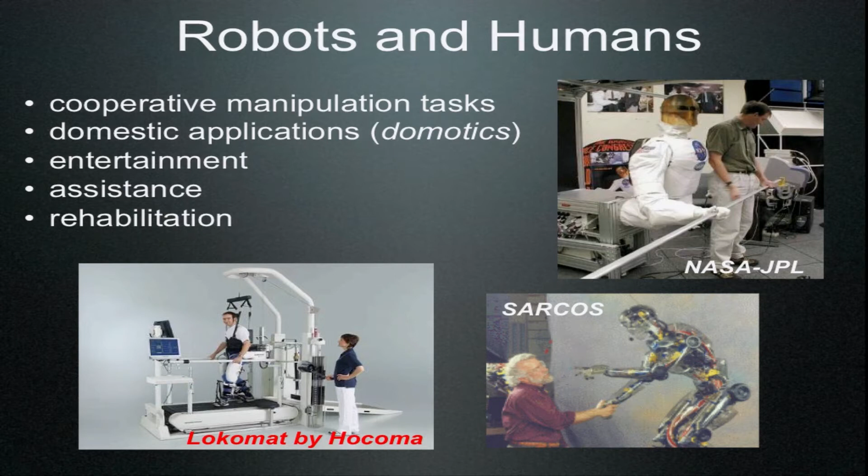So robots are everywhere, are coming. There are some special things that we want to focus on.

First is more traditional, is teleoperation. So there's a master-slave situation. You have a remote robot or manipulator anywhere. You interact physically with the master, and you receive force feedback from the slave. And this interaction is very important.

And of course, the human issues of this interaction are also very important, like fatigue or the capability of working for a long time with these devices on. Of course, this brings you somewhere else for doing tasks, but there's a large effort also for being helped here or wherever you are.

So what is called human augmentation, you see the Berkeley exoskeleton, very lightweight and handy, used mostly for military application unfortunately, but this is another story, which amplifies your capability. For instance, a soldier can carry this heavy load of 15 kilograms for almost the whole day, not being so

crashed, like if it had not this exoskeleton. There are other situations, very interesting, where you have mixed interaction with the environment. So you have physical devices that you touch or that you carry on your body, and you're doing some work in the real world and in a virtual world. So this is another very interesting development. So again, all this situation involves some form of contact between robotic devices and human.

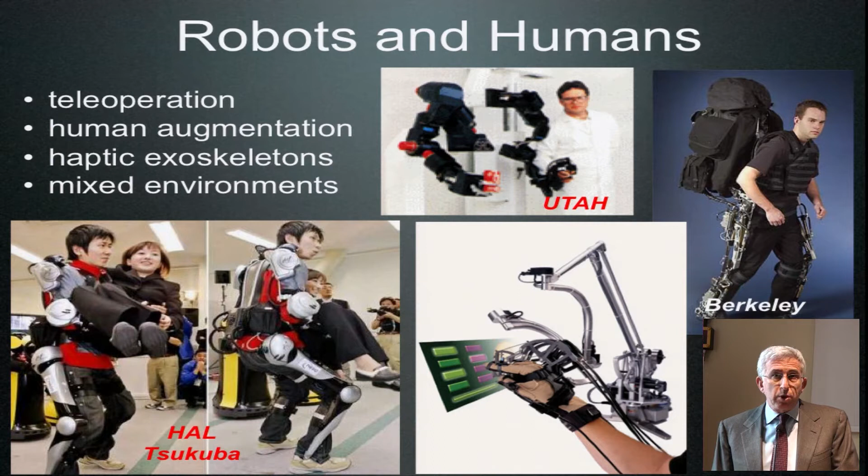So the main issues, or the principal issues, were at the beginning safety. What happens if the robot is not recognizing your intention or applying too much force on your body? And we should always preserve the concept of Asimov, the first law of Asimov. So the robot should never harm you, and so on and so on. So this is motivated researchers in the last decade, I would say, to investigate different types of robots, more lightweight, more compliant, but still with the capability of doing useful and accurate work on the environment.

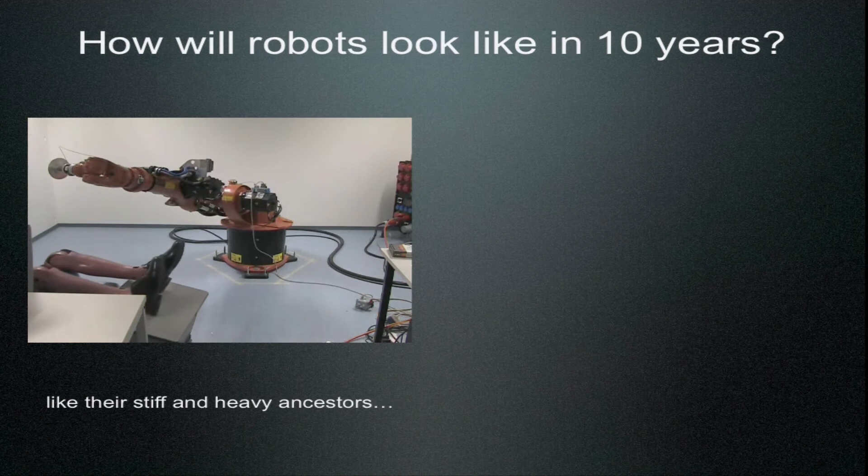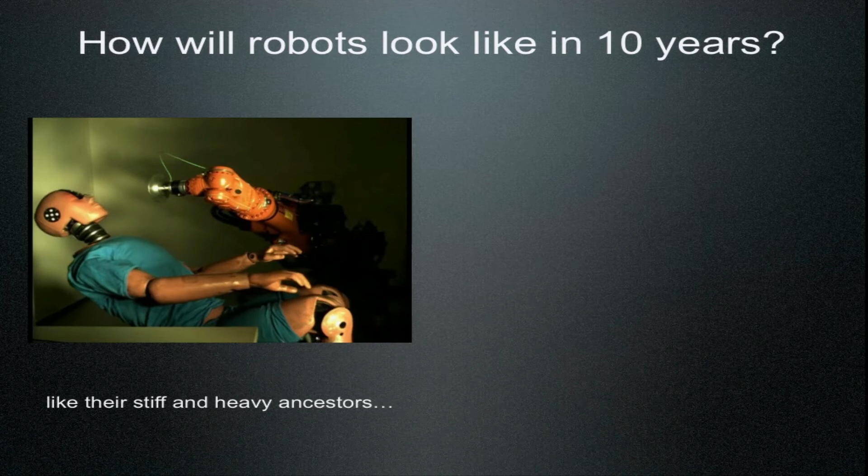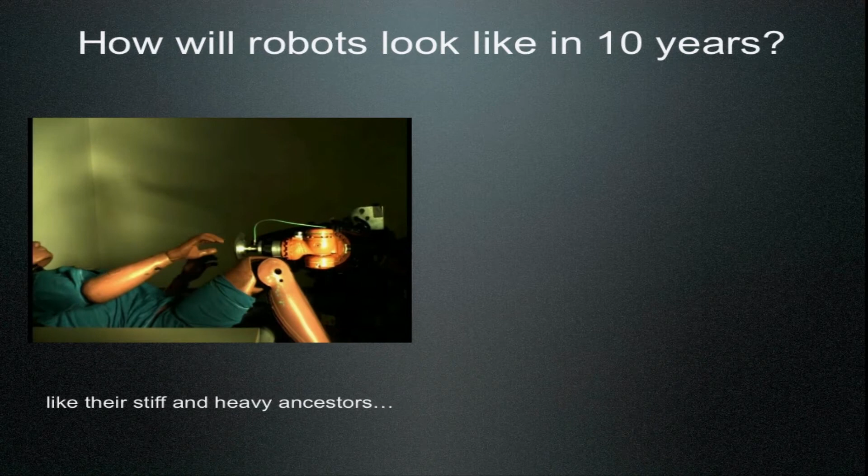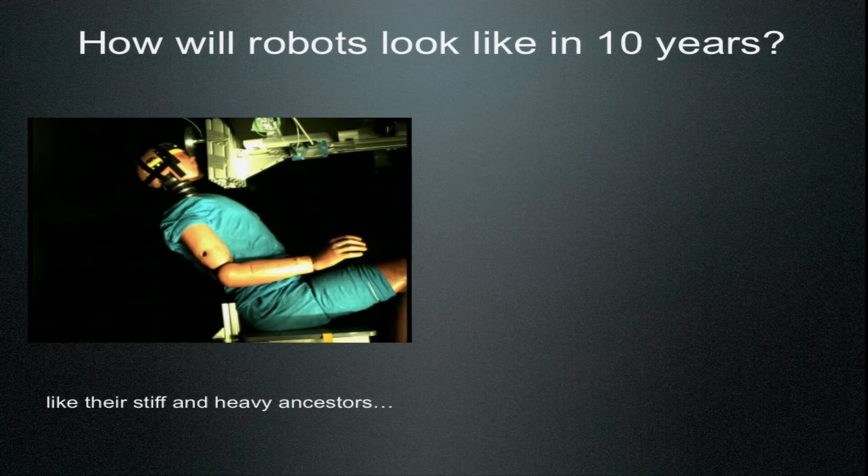Here you see a video recorded at ADAC in Germany, the Safety Institute for Automobile, where they use dummies for crashing tests. Now, instead of having a car, this is work done mostly by Sami Haddadin. They are investigating the harm, the injuries that can happen when a robot is hitting you. And it can hit you in different places. But the purpose of this video is not showing this experiment, but looking at the robot. The dummy may represent ourselves, very flexible, very harmful, and the robot is very stiff, heavy, and could be fast, and could really hurt the human.

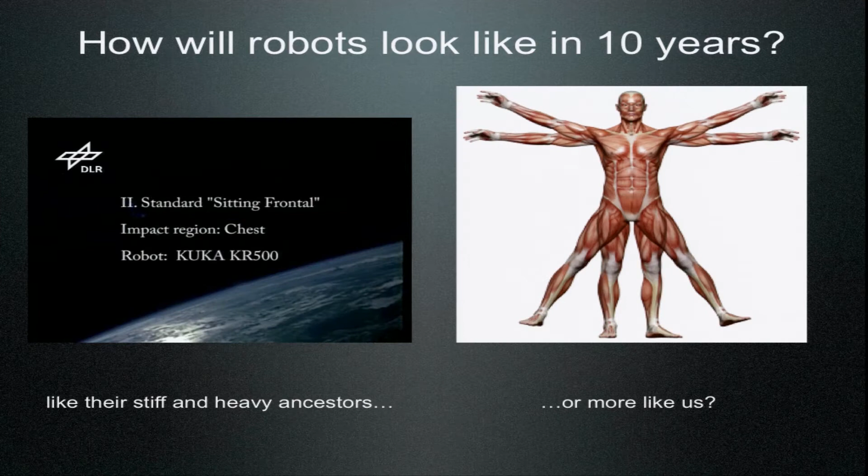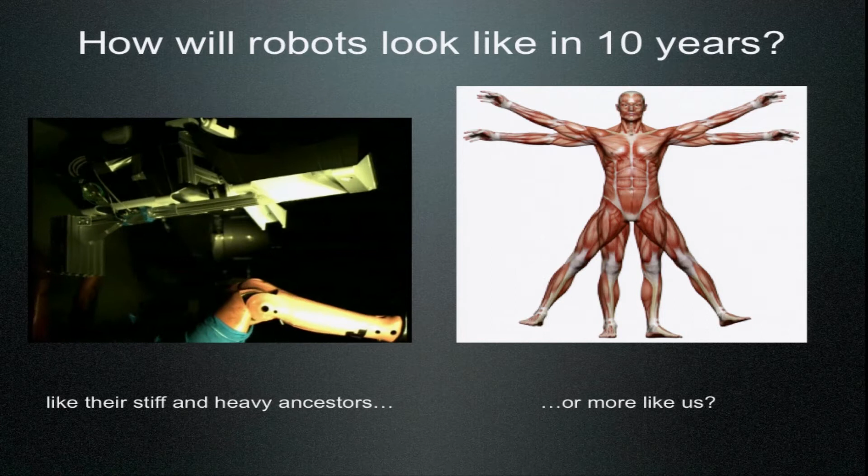So will robots continue to be like this in the next decade or so, or will they more and more inherit some bio-inspired morphology, in particular actuation capabilities of the human, which at the same time are able to perform such different tasks, which involves accuracy when it's needed, or compliance where it's needed, to accommodate for uncertain environment, uncertain forces applied to your body, and still provide sufficient accuracy. So performance is not lost at all.

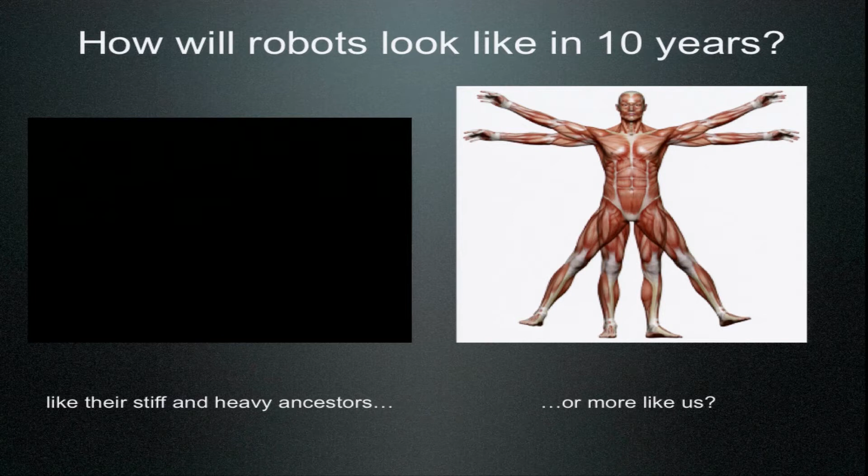Of course, this is a trivial answer to the question, because the answer is clearly we would like to behave like us. So let's look back at the recent or less recent past. I remember very well all these devices. You may have not seen them at all. I've seen them working. So many years ago, yesterday, there was the famous Unimation Puma robot.

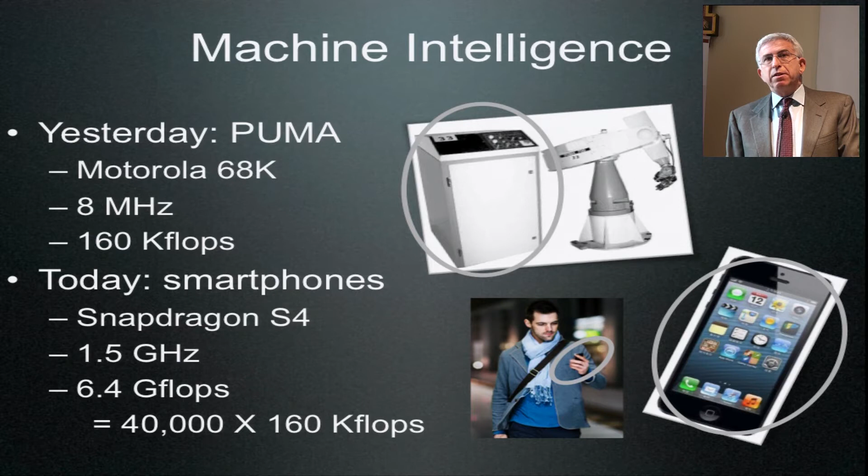This was the first anthropomorphic 6 degrees of freedom all-revolute joint robot, controlled with microprocessors. The control unit was a PDP-11, a mini computer, which was as big as this - you can tell the size. Inside, it had a Motorola 68K CPU with 8 megahertz of sampling and the capability of doing 160 kiloflops operation per second.

So this was yesterday. In terms of machine intelligence, you could do several things - you could do direct and inverse kinematic, even inverse dynamics for the Puma. This is a result of the 80s, I would say.

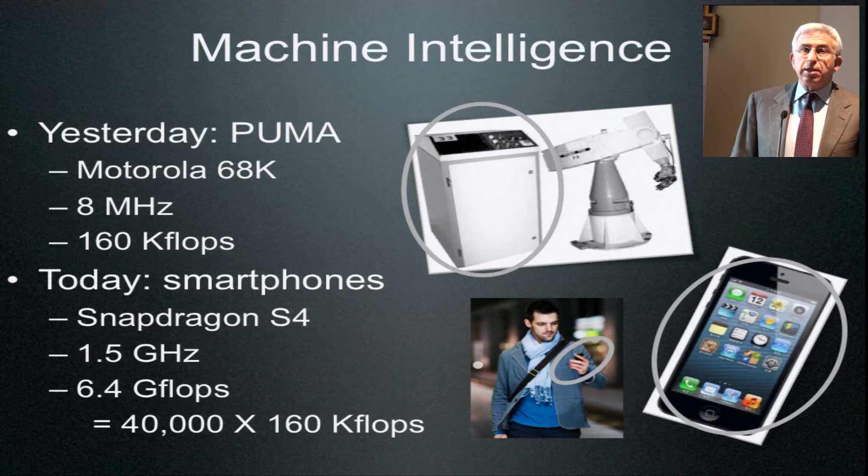Now, if you compare the computational power with, for instance, today's smartphone - please turn them off if you have it - well, there's a factor of thousands of improvement. In fact, in such teeny devices, we can embed a lot of intelligence. So we would think that this is an advance, and in fact it is also for robots and robotic systems.

What about motion? Remember that a robot is the intelligent connection between perception - sensor, sensing - and action. So the motion is always there. Otherwise, you have just a computer. Okay, so progress in computers, miniaturization and computing power - what about motion capability of robots?

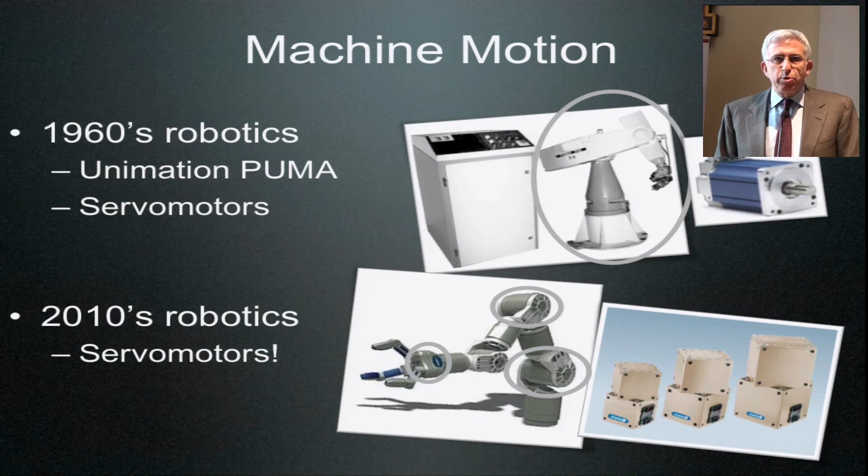So yesterday, the Unimation Puma had servo motors - here you can see one. There have been a lot of advances in this type of devices in terms of power density, size, cost, and so on. What happens now, or let's say 5 years ago? Still servo motors - so not really this 40,000 factor of improvement that we had in other devices.

So the problem that here we want also to help address is how to make robots that are soft, so that have a morphology of a human body. They are likely not to hurt if they hit a human being, but still strong to sustain loads, carry things like the industrial robots with 160 kilograms of payload or more.

On the other hand, we would like to have it simple, because complexity is not something that we're going to sell in the next year. Or at least the complexity should be hidden behind a very simple interface - simple in mechanics and in operation, but still dexterous, capable of doing tasks like those that we have seen in the videos, playing soccer.

2050, the robot team is supposed to beat, let's say, the Rome team of soccer. This is likely to happen. Intelligent, of course, we can embed a lot of intelligence, but yet practical in the sense that the human command should be easily provided and then realized in an intelligible way - what we call legible motion planning and execution by the robot, legible for the human.

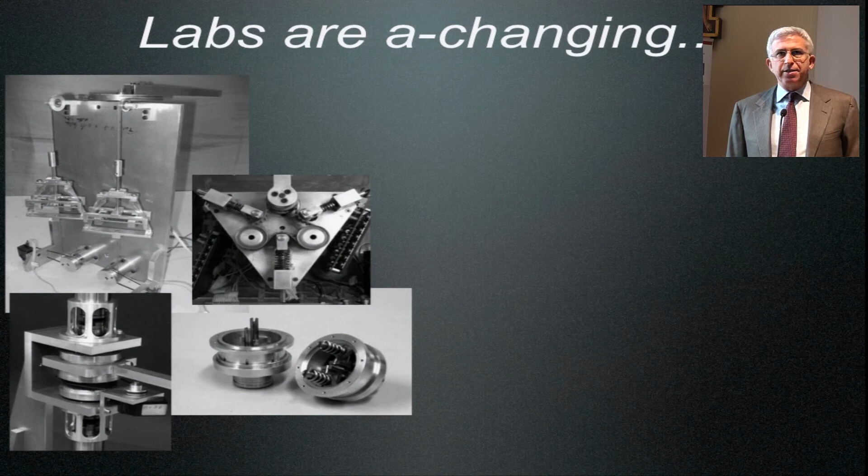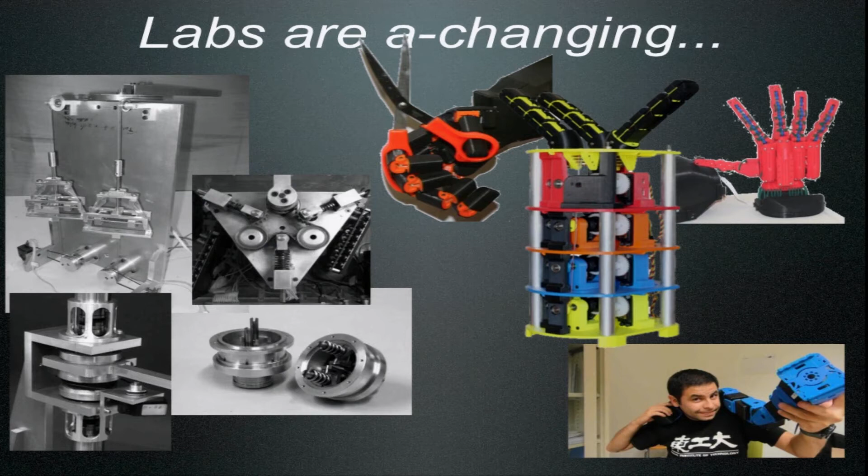But this is a gray area - it's gray, it's on purpose black and white pictures. Why? Because the latest activities in that lab in particular are full of colors. Full of colors means also full of novel prototypes that can be developed very easily thanks to innovative technology in rapid prototyping, thanks to open source software and open source tools, using the web to grab whatever other researchers have already developed and things like that.

Okay, so the robotics labs are becoming colored, which means that we can explore new ways and test them in relatively short time. This is a very important thing. And you can see here on the right some variable stiffness actuation, the hands, the Pisa IIT hand, and also a modular structure built with the QB modules that you will put your hands on in this school.

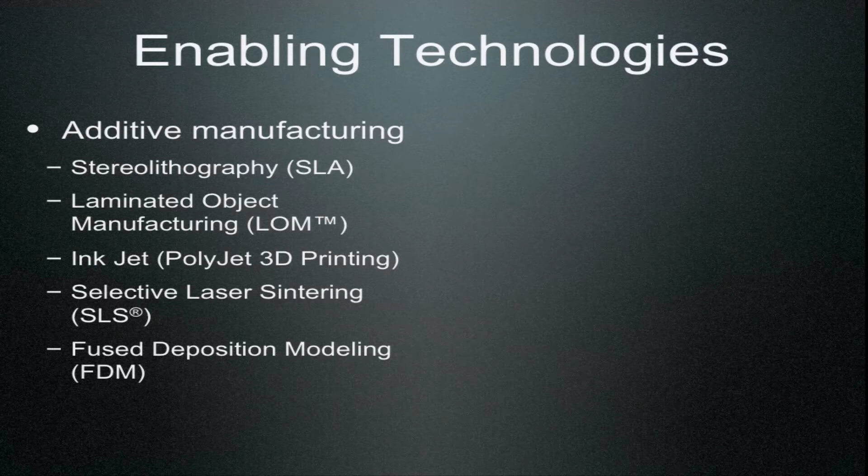So what are the enabling technologies for doing this step? First of all, additive manufacturing. There are a lot of methods, techniques for building in very short time and cheaply from 3D designs, CAD design, objects that you can use and test your ideas for developing actuation and connection devices.

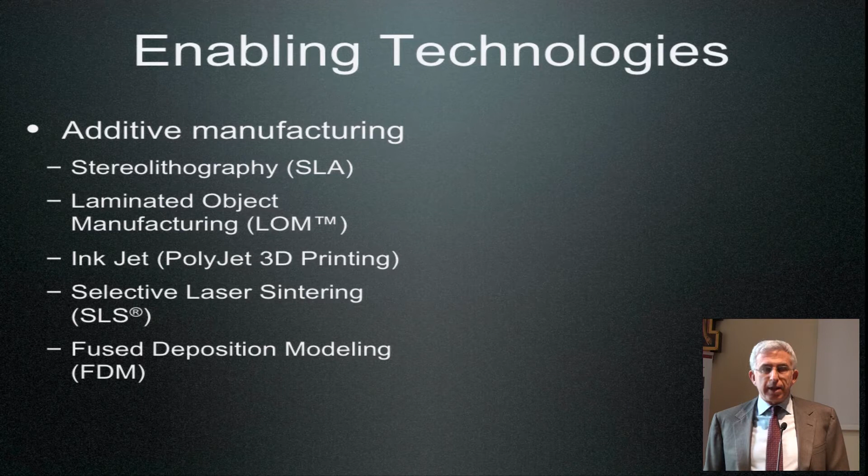Here is a list of several of them. You know that the 3D laser printers are really taking the speed, and the technology is changing. If you have one of these devices bought 3 years ago, it's already outdated, because there are much more cheap, compact, and performant devices right now.

And this is just a list of technologies. Together with this, another enabling aspect that allows us to develop new actuation devices and full body robots is the availability of open source embedded control systems, like the Arduino project.

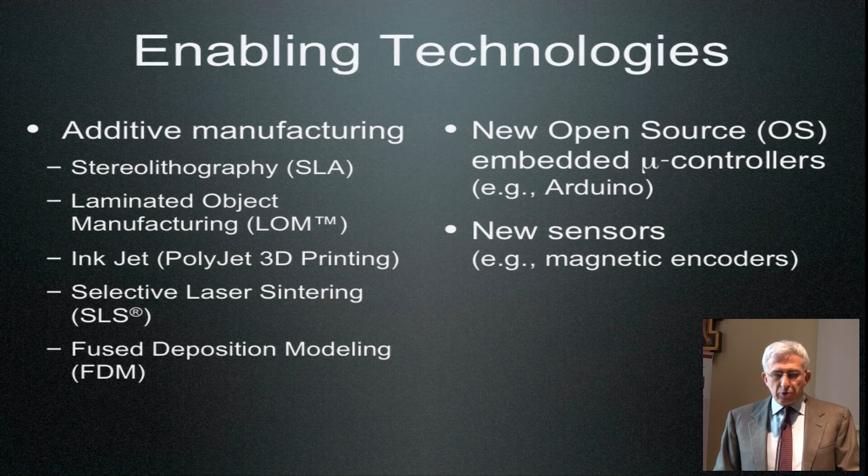I don't know how many of you are familiar with it, certainly the Italian attendees, but not only. There are new sensors, because we try to understand internally what's happening in all the parts of our devices, because this allows us to control them in a better way.

There are other tools which are very useful in this development, which allow you to easily obtain a hardware-in-the-loop system. So you have the hardware developed, maybe rapid prototyped, and you don't want to develop the controller in hardware or whatever you need. You have some simulation software that runs, and before doing the last step, you can put the hardware in the loop, just mimicking all the things that you may expect when you're really implementing things. And this is also very useful.

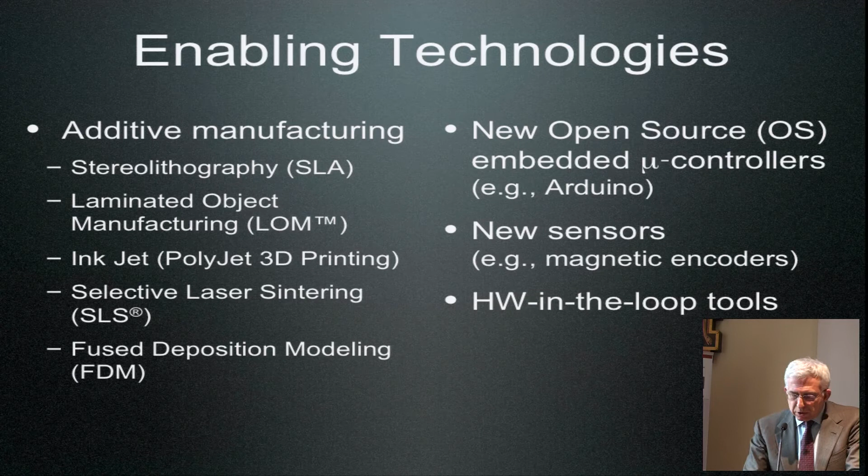And then there are other open source tools which help to work, software and middleware. Everybody, I think, is familiar with ROS. Other toolboxes are available in this same sense, like YARP, yet another robotic platform, which is a very thin middleware supporting the iCub activities, and so on. So these are technologies that may help.

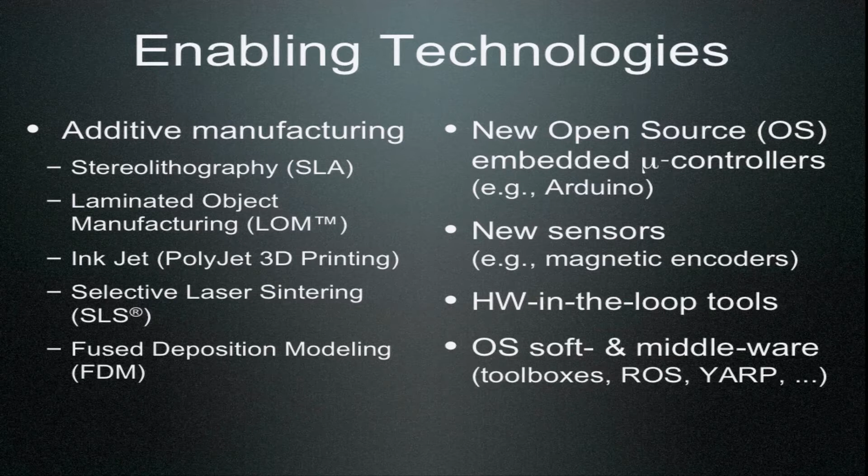But of course, we should join technology with science. What are the main ideas that could inspire us, and have actually already inspired many researchers? They come from the biological world, in particular actuators, so we immediately think of how human muscles behave.

The first observation, very simple, you can try it on your body, is that each joint has at least a pair of muscles moving it, and they actually move in an agonistic-antagonistic way most of the time. This is a modelization, a simplification of the real actuation in human bones and joints.

But you can think of groups of muscles acting in this competitive way. This kind of activation of those muscles, also called co-contraction, allows you to perform the same motion in two different modalities. My arm can move fast or slow, not important, but moving in a very soft way so that I can deviate from this trajectory very easily, or I can stiffen my muscles and move it exactly like before, but now when I hit something, I will never leave the path.

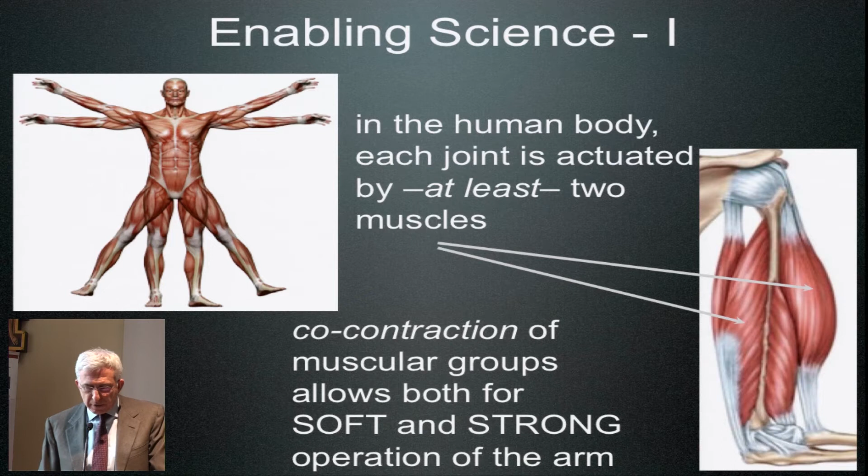So a couple of things coming from motor, biomotor studies. You will probably hear more about that in one of the presentations, probably by Etienne Burdet on Monday, I guess. He will talk about motor control inspired by biological studies.

So the first thing is this equilibrium point hypothesis. You can read whatever is written, so I will be very brief here.

But actually there's a threshold for activation of muscles, for each muscle, and of course for pairs of muscles. The idea introduced, or better said proved, in this paper in 2010, which was around even before, is that if you give an external load to such actuation muscles and you release the control so that you leave the system to evolve and find its own natural equilibrium, then there's always a situation called the equilibrium point, a combination between muscle length and force that is naturally associated to a given load. So the muscle may not be loaded, or loaded with 10 kilograms or whatever, and there is a natural equilibrium associated to this condition, which involves the contraction, so the length of the muscles, and the applied force by the muscles. So this kind of agonist-antagonist scheme is what suggests that even artificial single-joint devices may behave in the same way if properly actuated and controlled.

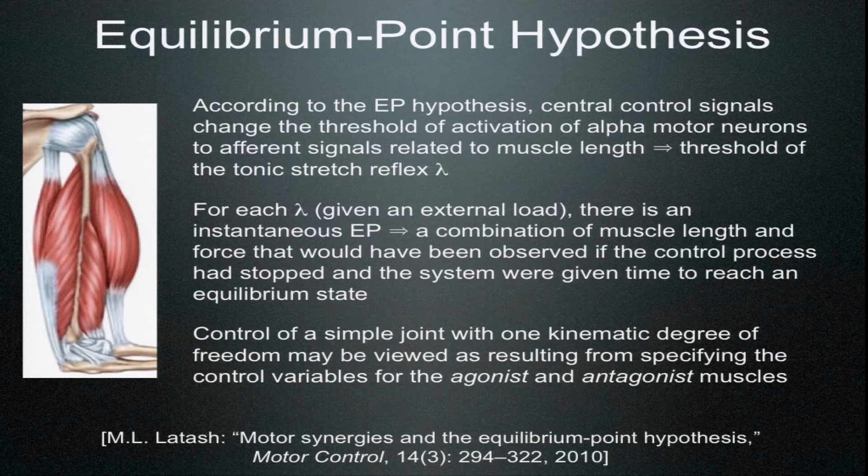So a couple of formulas. The first one expresses the muscle force, which is a function of a couple of parameters, rho and delta. Delta is the form of the muscle. Rho is the way some kinds of muscles are able to generate more or less force, which depends on the physiology of the muscle itself. There's another variable, the a variable at the exponent of the exponential, which is the muscle activation. Here you see a formula, it's a positive quantity, that's the plus outside the square bracket. You can see there are again some physical quantities and parameters in this expression.

L is the muscle length. D is the reflex delay, so T is time, and everything happens after some delay. In aged people, this time increases. Lambda is the threshold length, so you have to exceed this, and there's another parameter weighting the time derivative of the extension or contraction of the muscle, so L dot in time.

So if you put this together, you have some expression which relates activation, which is controlled by the nervous system, to applied force by a single muscle.

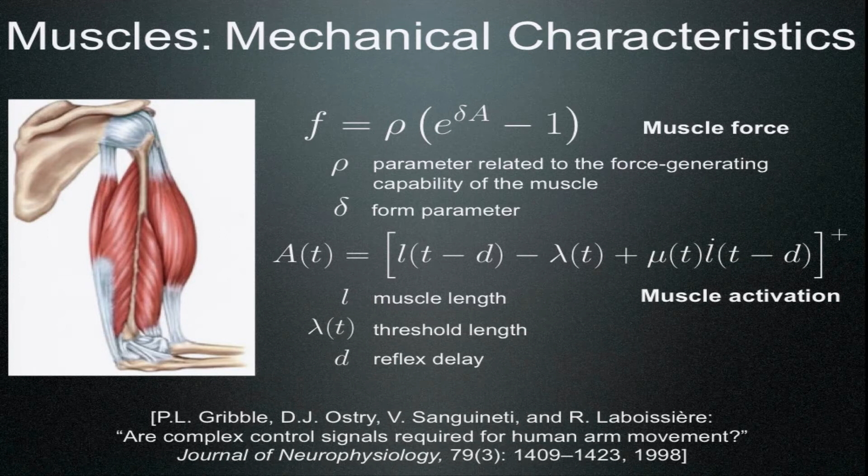If you have a couple of such muscles, you would like to find this equilibrium, as we said, depending on the load there's a different equilibrium. So the steady state equation is very simple. If the muscle applies a linear force, you want to balance a torque, so you need a distance, a lever arm, so R will be this lever arm, and F1 and F2 are the forces applied by the single muscle in this agonistic-antagonistic configuration.

So you have this balance equation. Now you can assume that R does not change, which is an approximation but it's okay, and also that the two muscles have the parameters rho and delta equal. So you can write the force F1 and F2 for both muscles and the activation expression, and introduce a variable Q, an angular variable, which is the rotation of the joint that these muscles are controlling. So this is the setup.

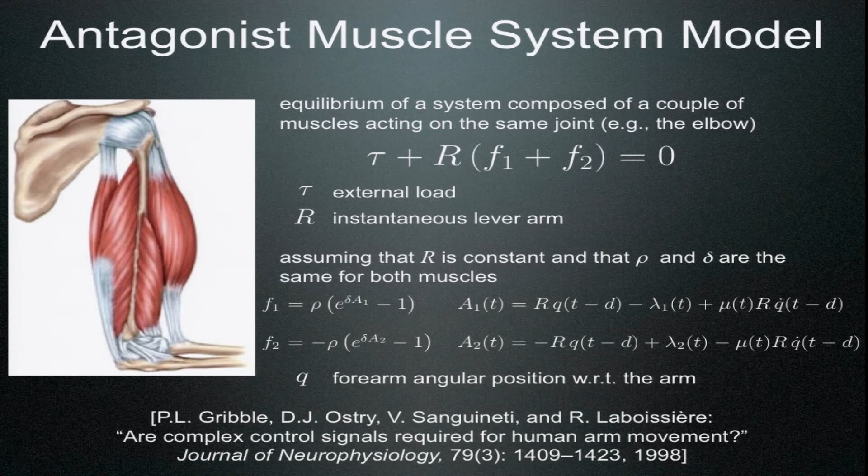Now if you neglect the reflex delay just for simplicity, and assume that you are at steady state, so Q dot equals 0, the joint is no longer moving, and make the assumption that there is no load, but you can change the load so it's constant actually, you can find an equilibrium position Q bar, the equilibrium position with no external load. There will be others with external load applied. You have to solve some equation to find this Q bar, but essentially the outcome is that...

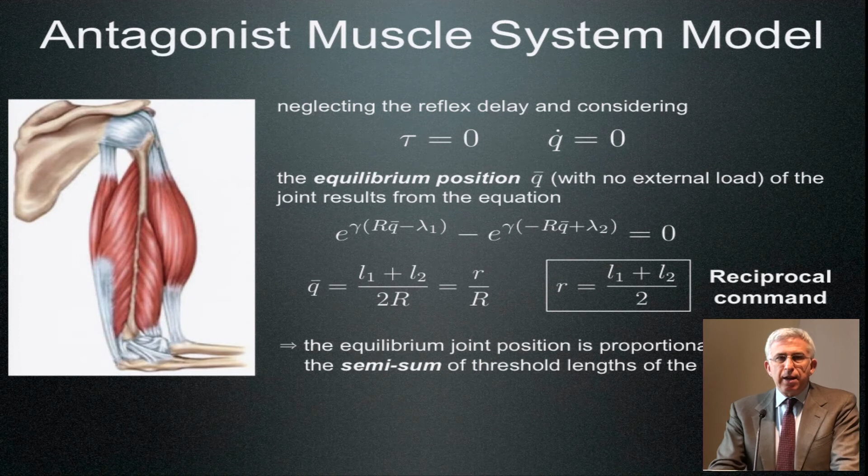you have some command R, which is just the semi-sum of the threshold lengths of the muscles. This is quite an important result, obtained in some simplifying conditions, but this drives also the design of some controllers for variable stiffness actuation devices.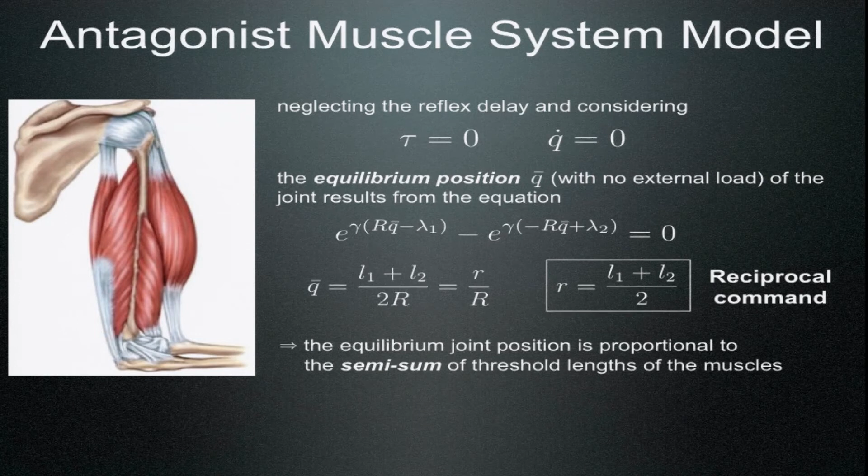What about the stiffness? Well, first of all, I hope everybody knows this. How do you compute the stiffness? You compute it as the variation, differentiating, taking the derivative of some applied torque, which balances the external torque, with respect to the variation of the driving joint.

So you can start from a potential energy, take the derivative of this potential energy with respect to the position, and you get the torque. If you take a second derivative, so the derivative of this torque, you get the so-called stiffness at some nominal operating condition, at the equilibrium Q equal Q bar, and in this case under zero external torque.

Here is the expression for the muscle under hand, and you can find a parameter there, C, in the exponent of the E function, which is the so-called coactivation command. Surprisingly, this stiffness around the equilibrium depends on the difference divided by 2 of the threshold lengths of the two muscles. So we have two functions, C and R, one proportional to the sum and the other proportional to the difference of these threshold lengths.

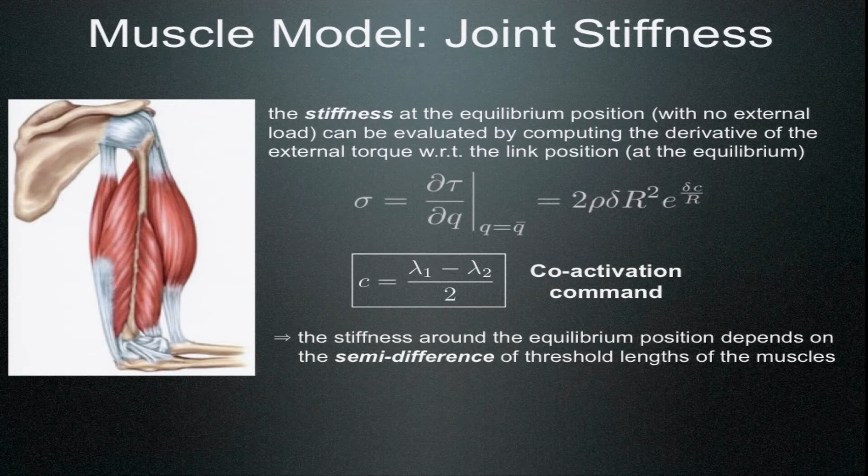So with this in mind, what was the evolution of actuation mimicking this biological behavior? We started from rigid actuation, so servo motors with very stiff transmission, where you can neglect in the limit any deformation. In some cases this is not true, for instance if you're using harmonic drives, which enhance the torque level available on the link side of the transmission, you have some intrinsic flexibility, but this is quite reduced compared to what you can achieve with really variable stiffness actuators.

This concept of compliant actuation motivated researchers to develop what is now widely known as SEA, series elastic actuation, which is modeled, at least, as a series of mass, spring, mass, and so on, with the springs probably also damped. In the simplest realization you have a mass, a spring and a damper, and another mass: the first mass represents the inertia of the motor, the second represents the inertia of the link. This is also called elastic joints, so the terminology of elastic joints and series elastic actuators is misleading sometimes—they actually are the same thing.

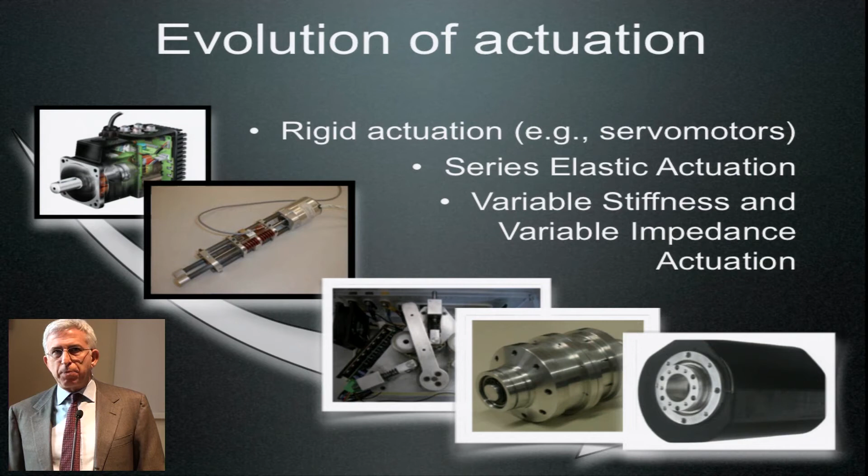So, can these variable stiffness actuators that have been developed in the last few years work as muscles for robots?

The problem from the control point of view is moving from the traditional position control—by this I mean also trajectory control, not just regulating a position but following a trajectory in the joint space or in the Cartesian space—for stiff robots, with rigid links, typically not lightweight, rigid links and rigid transmission, or as we used to say, rigid joints. This was the first motion task.

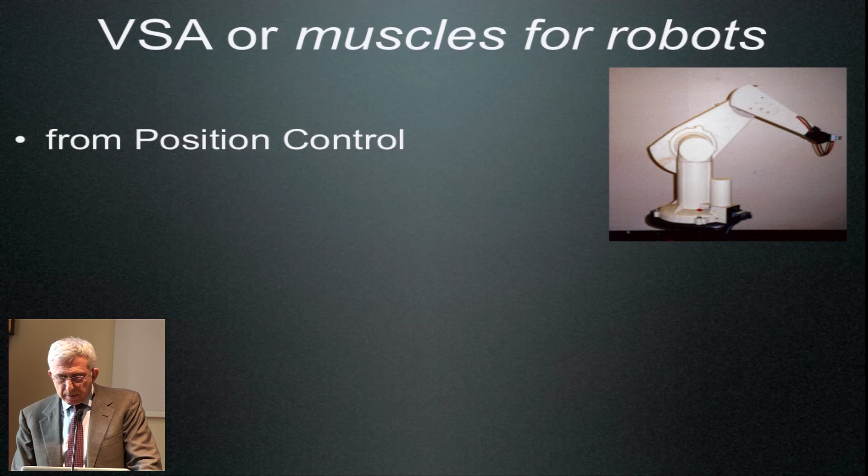Now the lightweight series—there are several. This is the KUKA lightweight arm, which is just the commercialization of the DLR series of lightweight arms. There are other products on the market, like Universal Robots and so on. What they promise is that you can do torque control.

So you can command not a position and have some local controller impose this position or velocity profile, but you can really command torque, torque at the joint level. Of course this torque at the joint level is useful for applying forces at some point of the structure, typically at the end-effector level, but this is a different story. So you can do torque control.

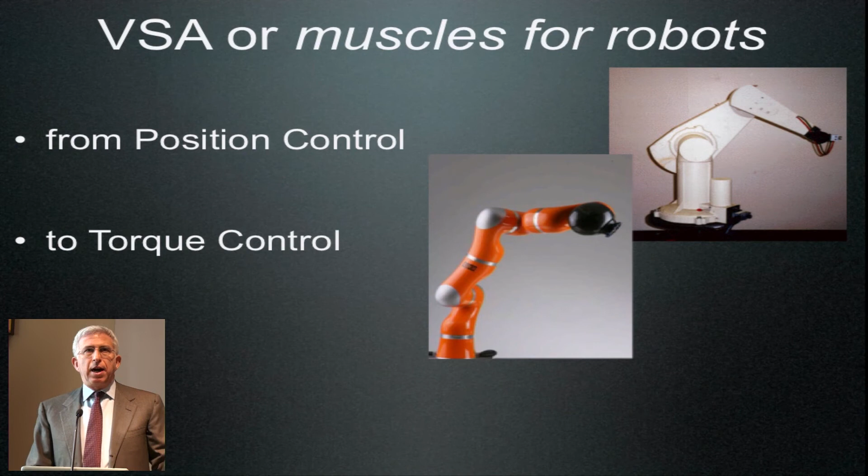Actually, the controller of the DLR, and in part also that of the KUKA lightweight series, and even including the iiwa, allows you to modify some parameter to move smoothly from pure position control to pure torque control, and to something in between, usually called impedance control. So still you have only one objective, whatever is the tuning of your controller.

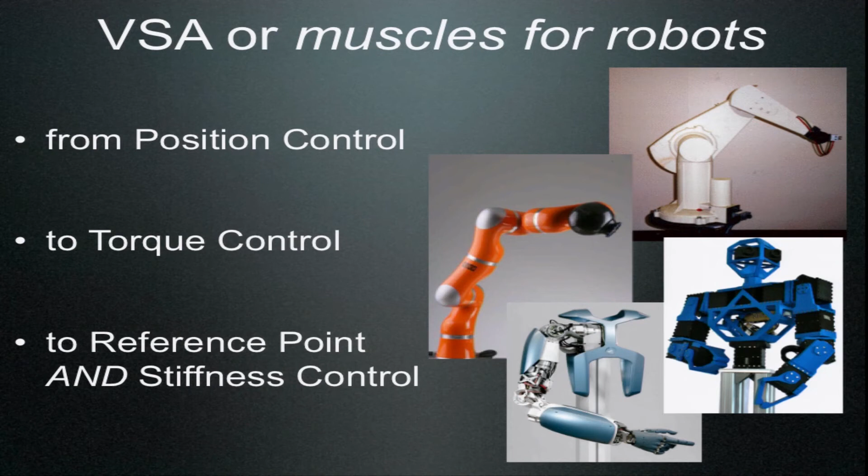Now, if you move to variable stiffness actuation robots, in particular multi-degree-of-freedom systems—you can see here a torso built from the QB modules, or the DLR variable stiffness actuated arm-hand system—now you have the point of controlling two things at the same time. In particular, these two quantities, mimicking the idea of human muscles, could be the reference point and the stiffness. This is the task that you can achieve.

So just looking at one joint—this is the development at the University of Pisa over the years—they started with a soft arm where the two actuators of the single joint... in fact they built a 3-degree-of-freedom manipulator, but each joint was actuated by a pair of McKibben actuators, so pneumatic actuation. It was compliant, kind of jerky, not really accurate, but it was implementing this nice idea.

In 2003, they developed the first version of the variable stiffness actuators—you can see here a top view, and the three locations: these are the output shafts of the two motors, and here is the link rotating around its output shaft. To describe this system, you need to know the position of motor 1, the position of motor 2, and the position Q of the link. Of course, they interact through nonlinear or linear springs connected by nonlinear kinematics.

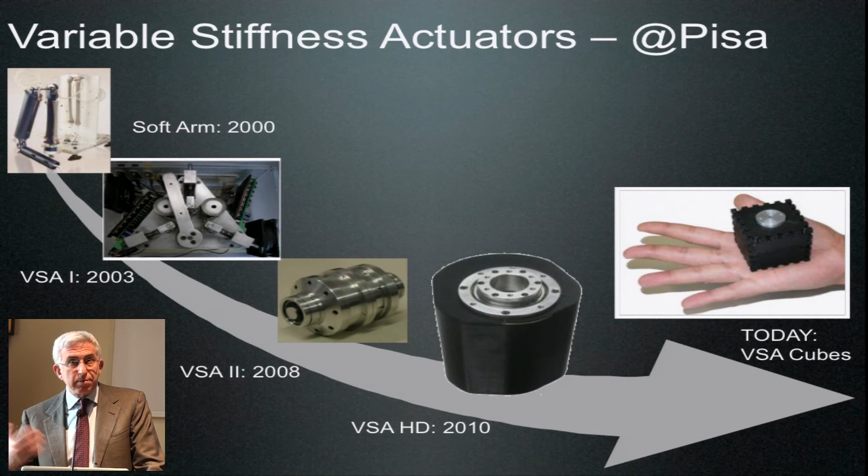This was later developed into the VSA-2 in 2008, and then here is a VSA with harmonic drives—this is also a concept used at DLR. Today you will see the VSA cubes, which are small, compact, low cost, and this is the rest of the story. Of course, variable stiffness actuators are now diffuse worldwide—here you see realizations at IIT, at DLR, in Korea, Japan, and so on.

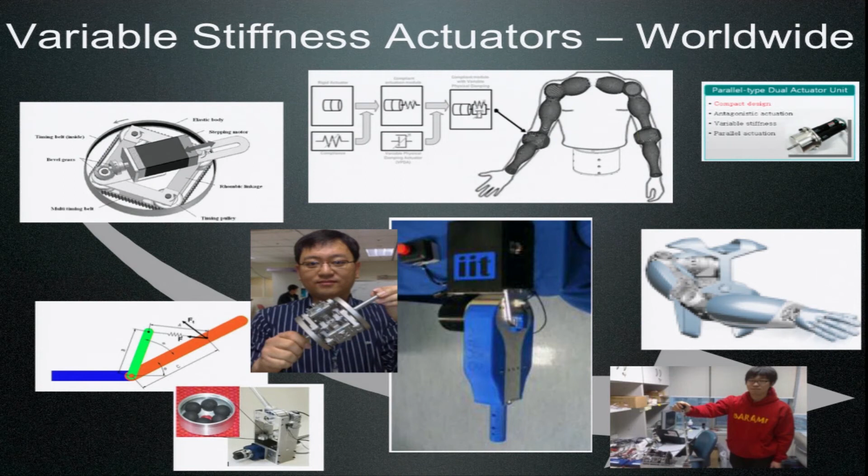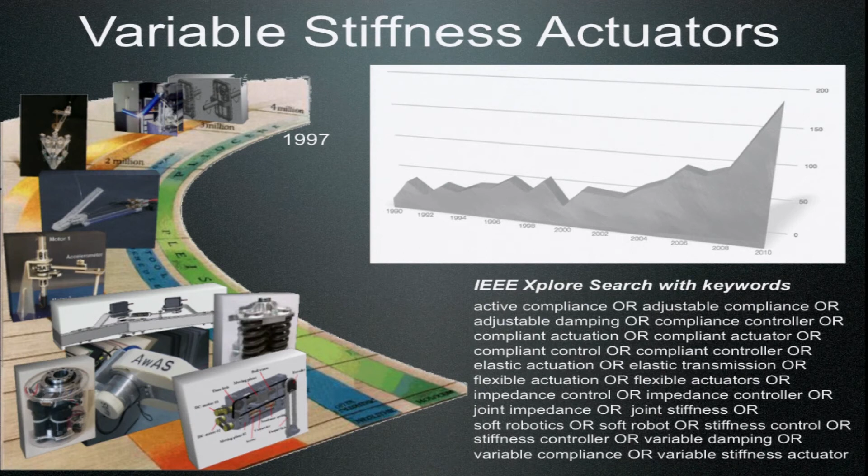So this is not just a trend from University of Pisa or the Italian gang. If you look at the diffusion of technical scientific papers on this subject, here you have a story on the left, a chronographic distribution of devices, while this plot is obtained with IEEE Xplore, where you search for keywords related to this problem: active compliance, adjustable damping, compliant control, elastic transmission, stiffness control, and so on. Between 2000 and 2010 you see a huge increase in activity, which witnessed the interest worldwide in this topic.

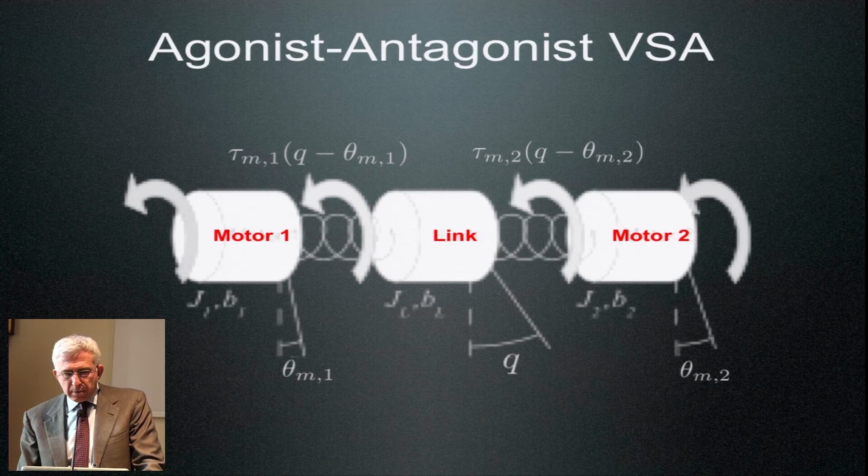Let's say a few words on this, then I have to skip some things. This will be one type of variable stiffness actuation that we will consider: the agonistic-antagonistic arrangement, so two motors and one link, with nonlinear springs connecting the motors to the link with definition of variables. This is in fact embedded in one of these cubes that you will be working on. Here you see the torque characteristic, a very nonlinear expression of the difference between the position of the link Q and the position of each motor, theta M1 or theta M2. These are the torques acting on the transmission on the two sides.

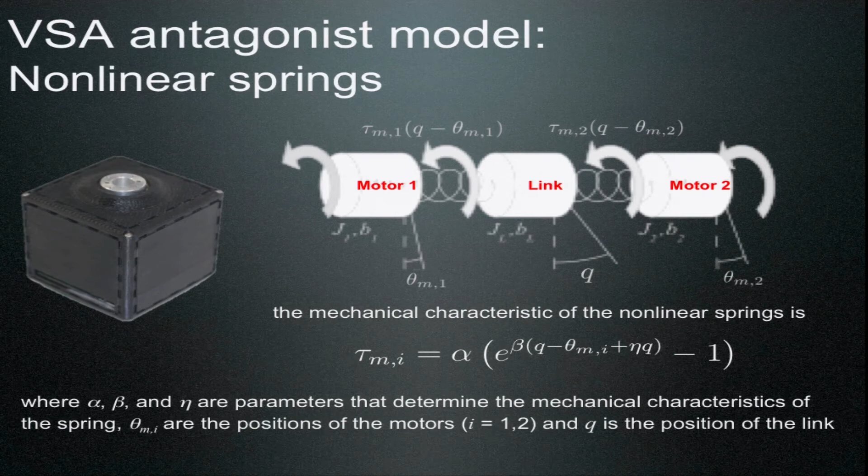Again, here we can mimic the same analysis done for the muscle, so we can find a natural equilibrium position, for instance with no external load, putting velocity to 0. We find that the reference position actually is the average of the motor position. So in particular, if you have the two motors, one pushing on one side and the other on the other side, there's no motion of Q, but of course you can implement some position, and also some stiffness.

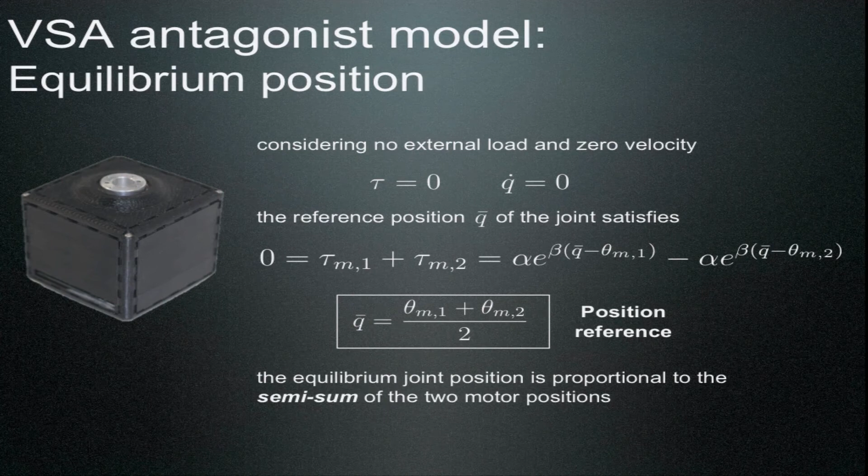The equilibrium joint position is proportional to the semi-sum of the two motor positions, while for the stiffness you do exactly the same. You take this expression of tau, which is the sum of the tau m of each motor, and you take the derivative of that with respect to the position of the link at the current equilibrium configuration. You find a parameter appearing in the exponent of the exponential, which is k, the stiffness preset, and this is proportional to, or it's the semi-difference of the motor positions.

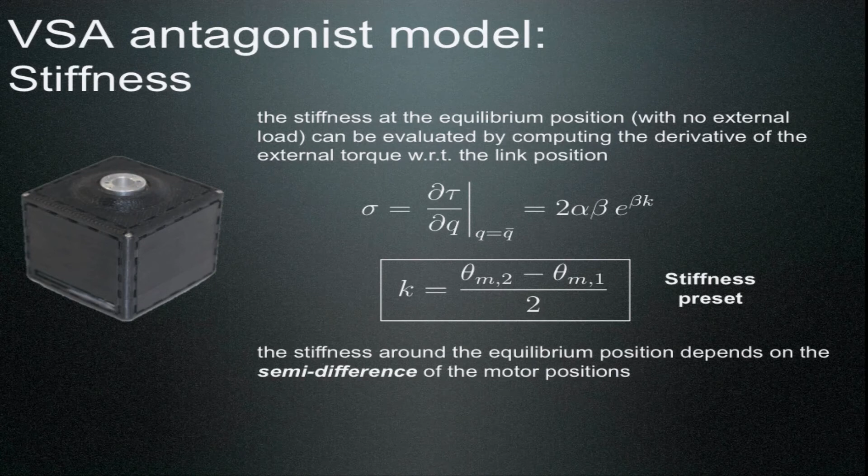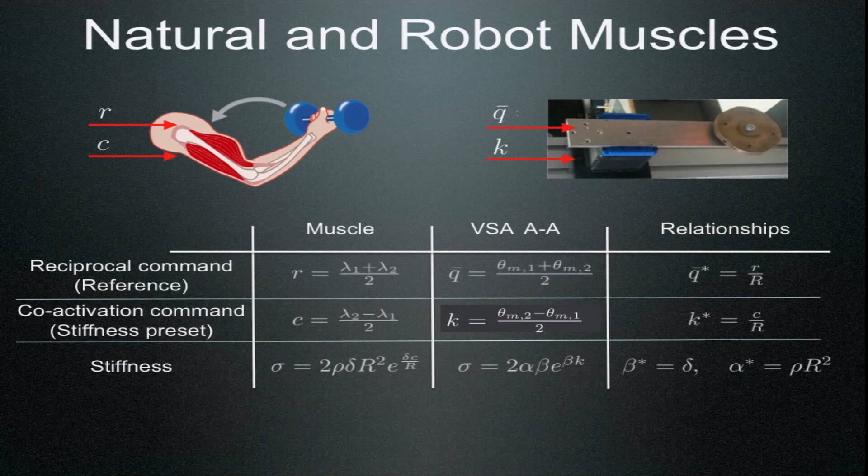So again, you see that this device emulates completely the behavior of the antagonistic-agonistic muscle pair in humans. And in fact, you can set up a comparative table here. What we call the reciprocal command or reference for the muscles, R, is the Q bar in the agonistic-antagonistic variable stiffness actuation. What we call the coactivation command in the muscle is the stiffness preset K in the mechanical device, and then there's an expression for the definition of the stiffness, and other relationships in this table, but you will hear more on that.

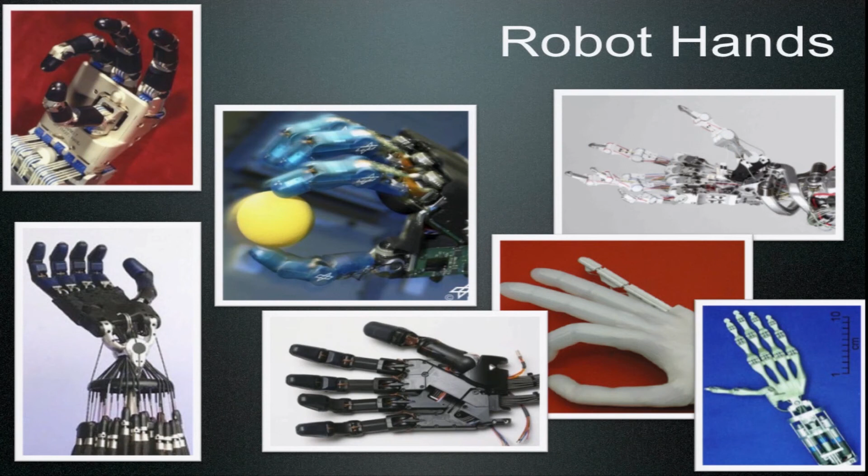Well, I will skip this part because of time. So this concept has been used, and this is really daily bread for Antonio on the hands, and in particular there are many robot hands. Just the concept here: research in this area, including Antonio's research and his colleagues', was really looking for an anthropomorphic hand, 5 fingers if not 3, multiple degrees of freedom, opposable thumb, and so on, with a lot of sensors, a lot of actuators, and some intrinsic compliance due to the fact that these actuators had to be relocated and connected through steel cables and pulleys. So very complex devices. At some point, people realized that maybe this is not the best way of doing things, and in fact here is the second - not just the technology, but also the enabling science results were coming from the concept of synergic motion.

So in particular for the hand, there are some studies that had shown some synergy of motion of the various degrees of freedom, the many degrees of freedom of the human hand, and some constraint so that the motion of a single elementary joint cannot move differently from what the others are doing. So there is some cooperative motion which can be represented by an elementary combination of motion. This is the concept of synergy.

If you use this concept of postural synergies, which are nothing else than a statistical quantity, the principal component of the grasp covariance matrix, related to how the hand is grasping the object, you can extract this computationally. You can recognize a first principal component, and this principal component is able to explain 50% of the types of human grasp, which is already a rather surprising result.

If you take two of these elementary synergies and combine them, you can cover up to 84% of the typical grasp, with three up to 90%. You have to add many more synergies if you want to cover all of them, because the human hand can take and manipulate objects in a multiplicity of ways. We never use them all, but they are there. So the concept of synergy is simplifying things.

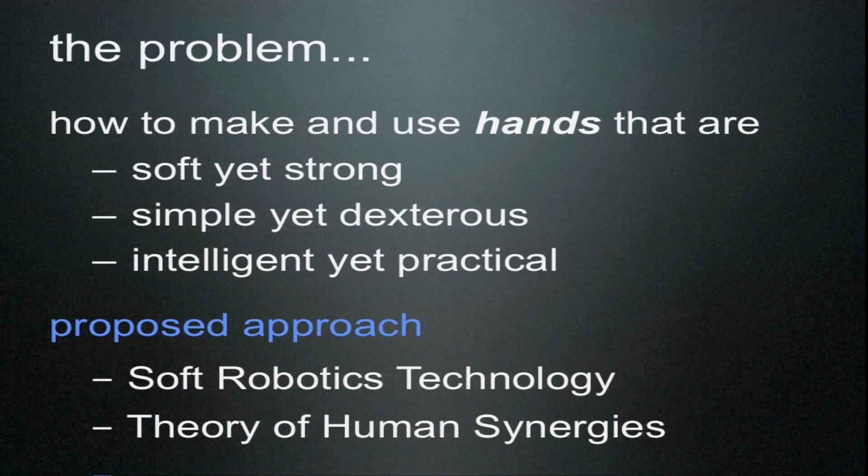It's exactly the same idea as the variable stiffness actuation for robots. Soft robotics technology is a terminology that embeds all the things, and some scientific theory behind it, which is the theory of human synergy, not just human muscles like in the actuators. Soft synergies means that we have a grasp, but we can also comply with the object that we are grasping. There will be a deformation with respect to the reference position, which is the one associated to the synergy. If you implement this, you're able to be very robust and adapt to a multiplicity of objects, and you will see more on that probably.

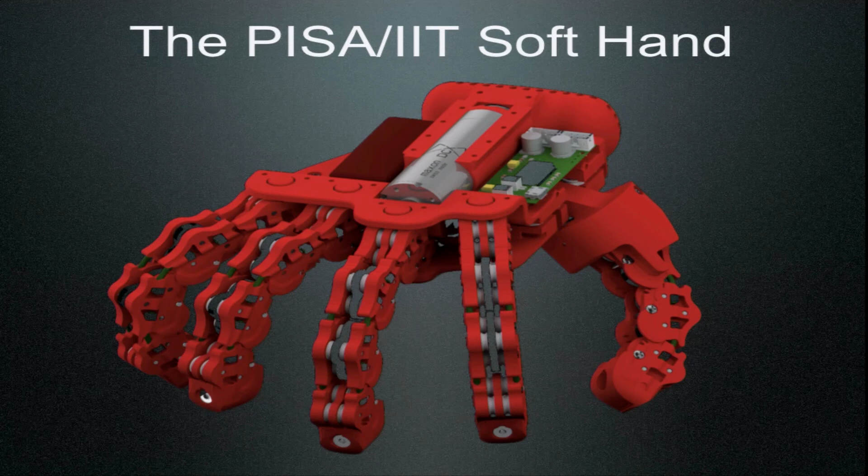And this is the PISA IIT Soft Hand. With just one single motor, you can see it on board doing multiple grasps. Maybe some of you have seen some video of that.

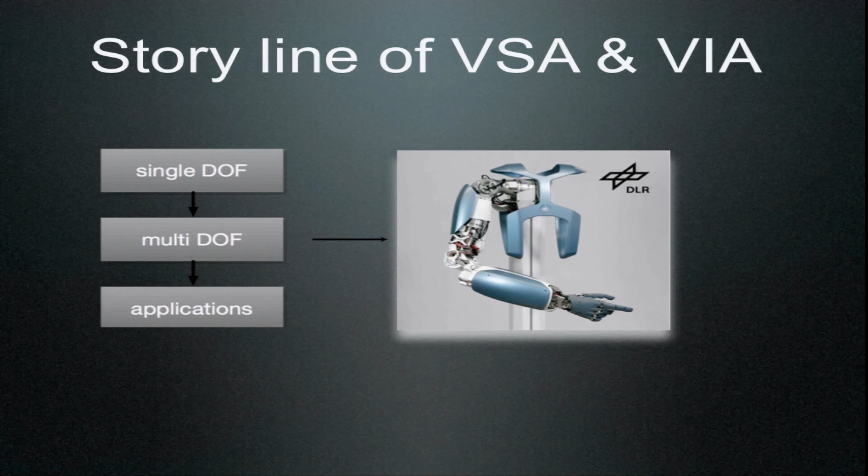So why this Natural Machine Motion Initiative? This is the storyline of variable stiffness actuation and variable impedance. We started with single degrees of freedom, then integrating this in a larger structure, multi-degrees of freedom, and then going to application. There are a huge number of applications for locomotion, for manipulation, as we have seen. If we want to realize high dynamic tasks like throwing an object as far as possible, if we want to have physical human-robot interaction under safety constraints, which means we have to comply, detect collision, and react in a very compliant way, if we want to do haptics or telemanipulation, wherever we have an unstructured environment that presumes you may collide with this environment, and so on.

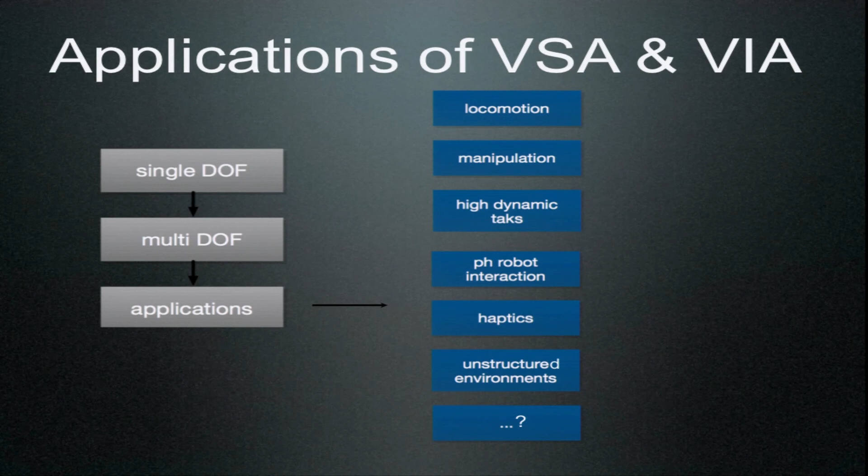We could go on forever, but the idea of this initiative is that a group of very smart researchers can think about applications, but this does not cover the whole world. So we believe, we suspect, that there is a much wider set of applications that could be used, and the idea is to do crowdsourcing. Building up a community, distributing materials, sharing ideas, sharing results, experience, so that trust in this will be larger, and some unexpected application may pop up somewhere in the world.

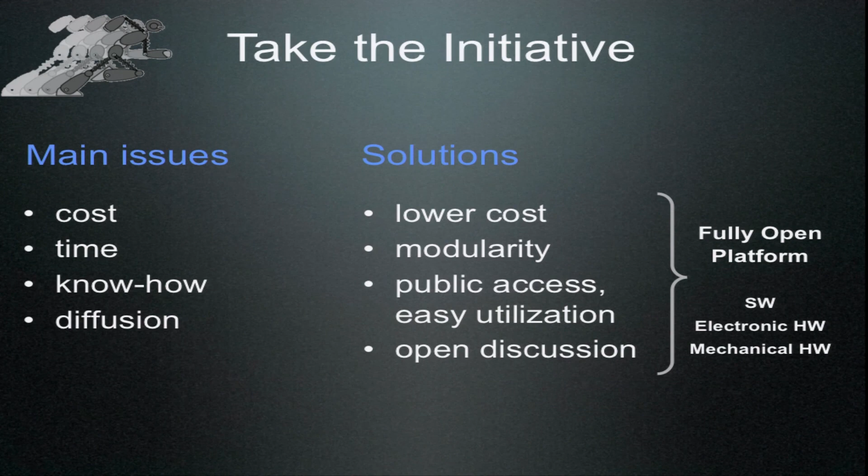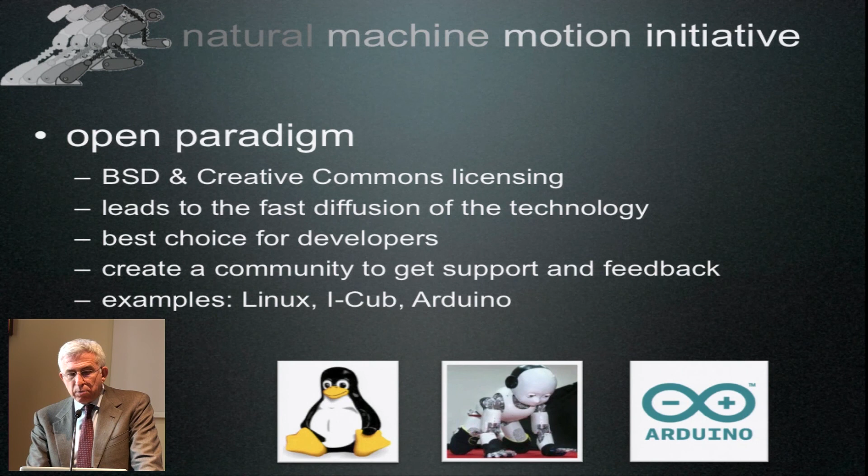The open paradigm follows some previous ideas, the Berkeley type of copyright or Creative Commons licensing, which helps in the diffusion. The idea here is that we want to start creating this community. There are other examples in computer science or even robotics, like Linux development or the iCub, or even Arduino.

The website, I guess you have already visited. It's divided into three main sections: one is exploring, one is documentation, and one is joining events like this one. In exploring, you can find several drawings of actuators, accessories, full systems, and so on, so that you can make things on your own.

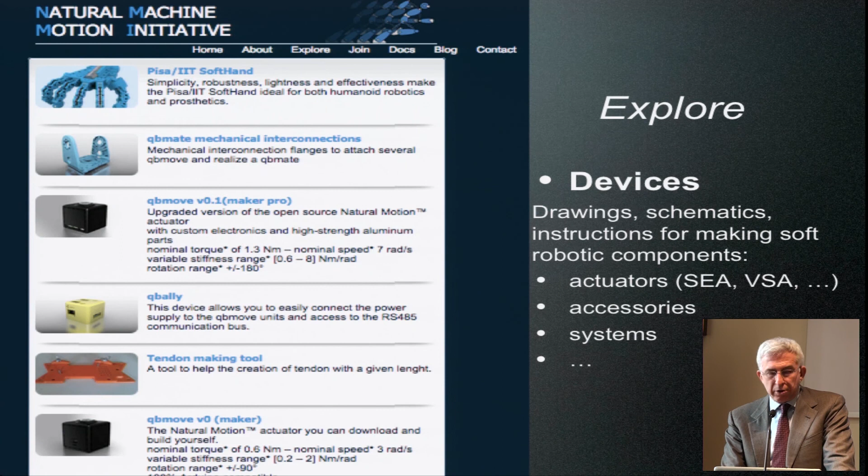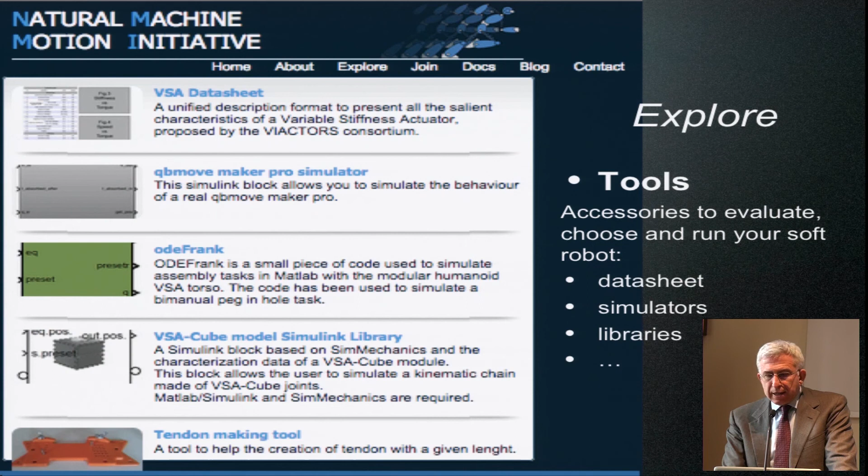The tools are datasheets, simulators for instance in Simulink and other SimMechanics, and libraries of code already developed by the group and by other members of the community.

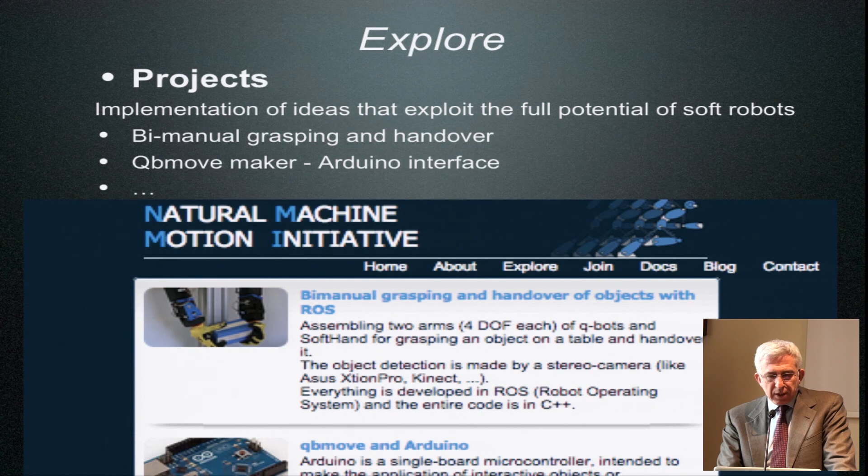And in fact, you can also look at some initial projects like the bimanual grasping and handover, or the Arduino interface for one of these devices, the qbmove maker.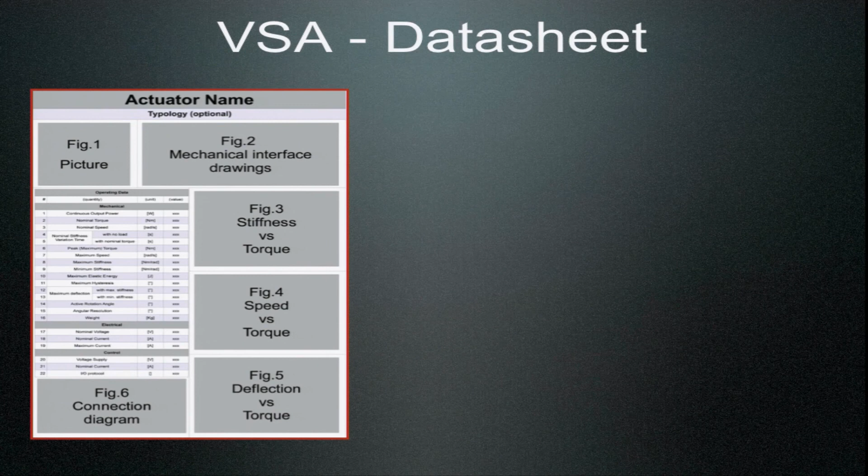This is one example of a VSA datasheet. Actually, the project VIACTORS has developed this kind of result. So how do we qualify one of these actuators?

Like a DC motor: you look at the characteristic of current versus torque, or voltage versus torque, and that's it.

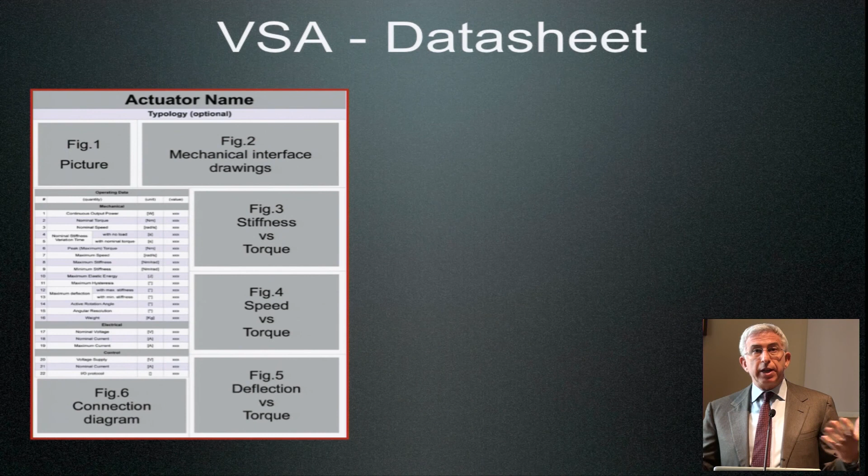Here you have multiple things to keep an eye on. It's not just motion, but also stiffness, range, speed of variation, and things like that. So you need a datasheet which can be used for any new devices, and this was the effort here.

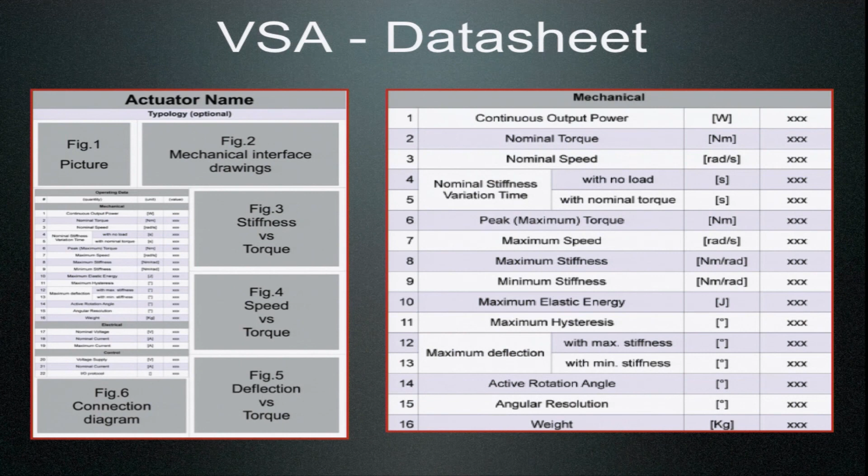You see some of the parameters that are of interest: maximum speed, peak torque, minimum stiffness, maximum stiffness, and so on. You can find some of these datasheets on the website, and if not, you will find them on the website of Viactors.

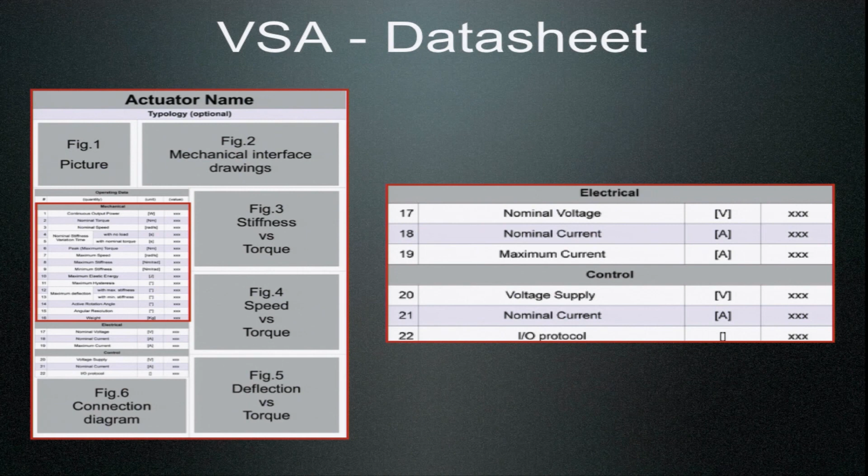Also the drawings, the mechanical interface, the electronic part, these characteristic curves, and things like that.

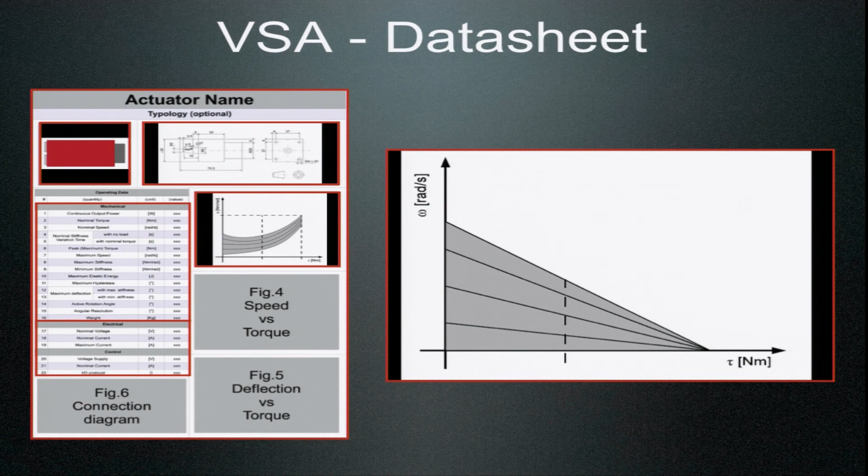Finally, through the website, you can reach events like this winter school, and you can contribute by sharing your project, and most important, taking the initiative. Once you become acquainted with these devices, and if you like them, as we hope, you can become an ambassador of these things. There's no money involved at this stage, remember.

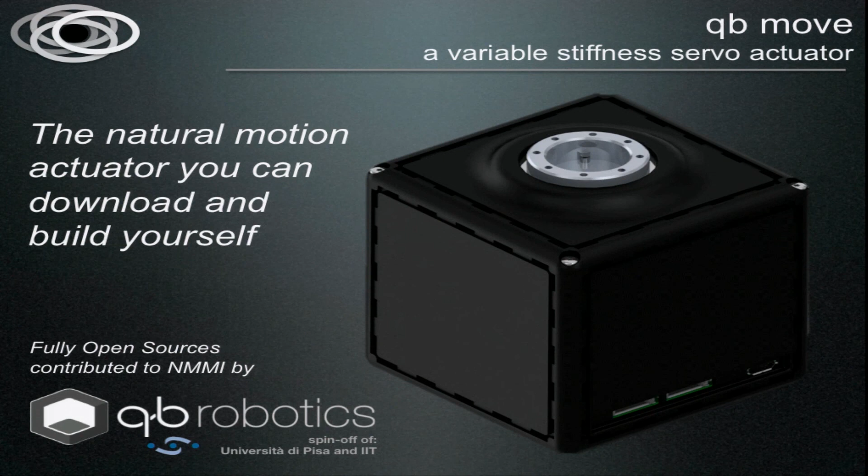And this is the QB Move that you will be working on in the hands-on session. And I can stop here.

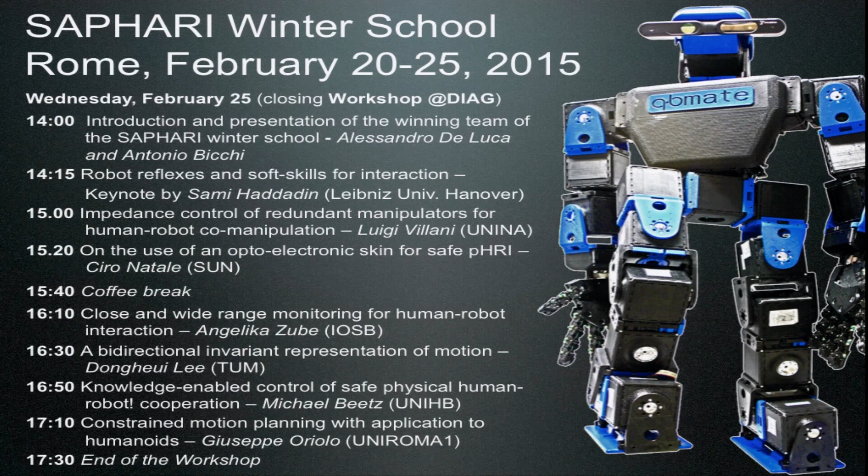There will be other attendees, not just people from the school. There will be the partners in the SAPHARI project, the reviewer from the European Community, students from my department, and other Italian researchers coming on purpose for this event.

Okay, thank you very much.